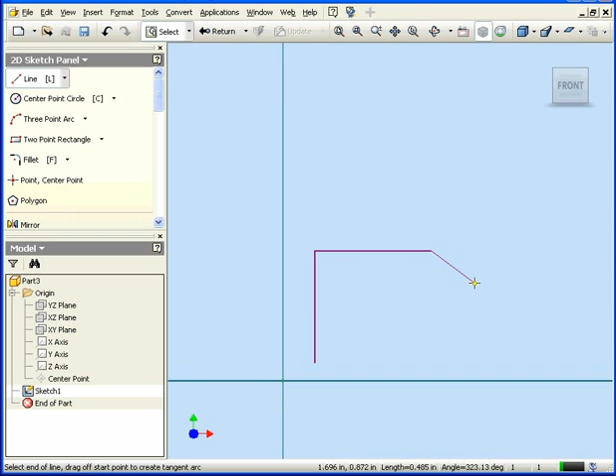Welcome to our tutorial about the Extrude tool. Here I've already got a sketch I created on the XY plane. Let's begin by using the line tool. I'm going to create a shape. Something like this.

Right-click and done. It's a good idea to fully constrain your sketch before making it solid. However, sometimes it's not always possible. Fortunately, Inventor lets you work with unconstrained sketches. Let's hit Return, exit the sketch, and let's select the Extrude tool now.

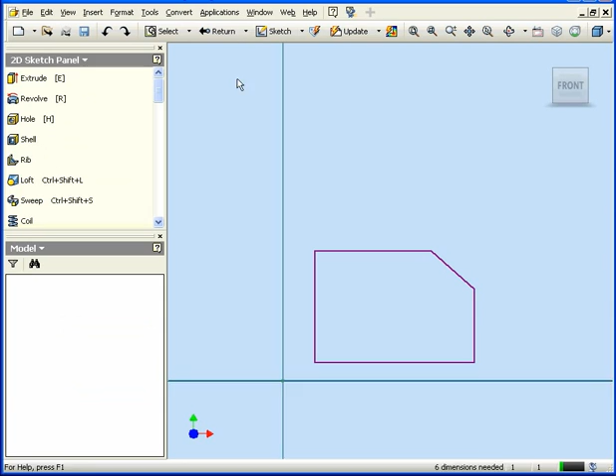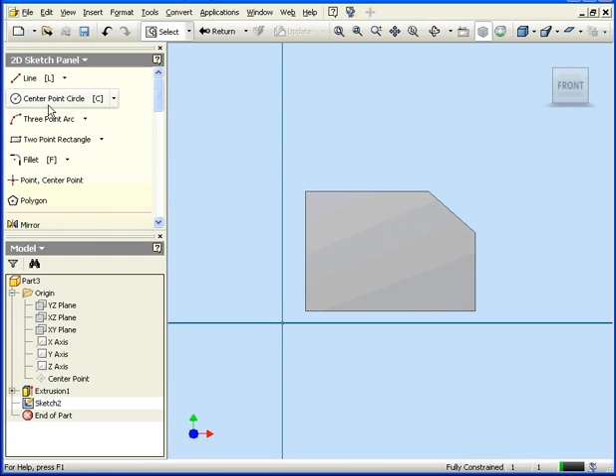Extend to both sides and click OK. Now let's return to a front view. We'll create a second sketch, again on the XY plane. Let's create a circle. Somewhere around here.

Right-click, done. The reason I don't see the circle I created is because it's partially covered by the solid. I need to right-click and select Slice Graphics. F7's the keyboard shortcut for that, by the way. Okay, let's create one more circle.

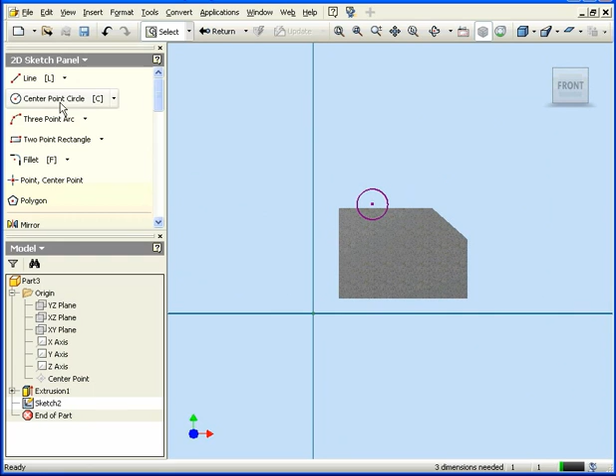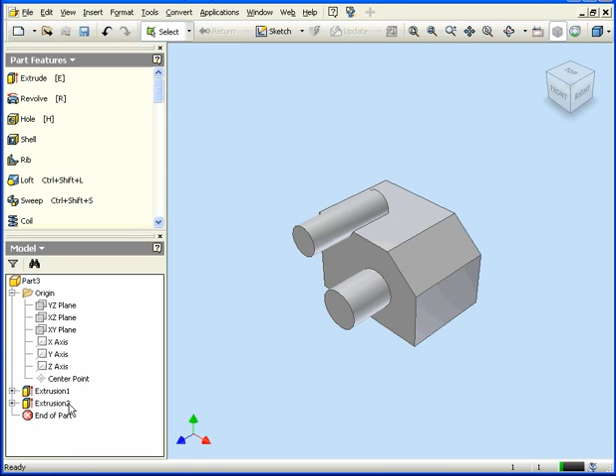Return to exit the sketch, and now let's select the Extrude tool again. This time we'll select some profiles. Selecting the Join option here will add material. To edit Extrusion 2, double-click on it. Its dialog window opens. The next option here is Cut. This removes material.

Let's double-click again on Extrusion 2. The final option here is Intersect. This creates a solid from the shared volume of the extruded features. The Extents drop-down menu lets you control the method for ending the feature. The Distance option lets you specify a specific length.

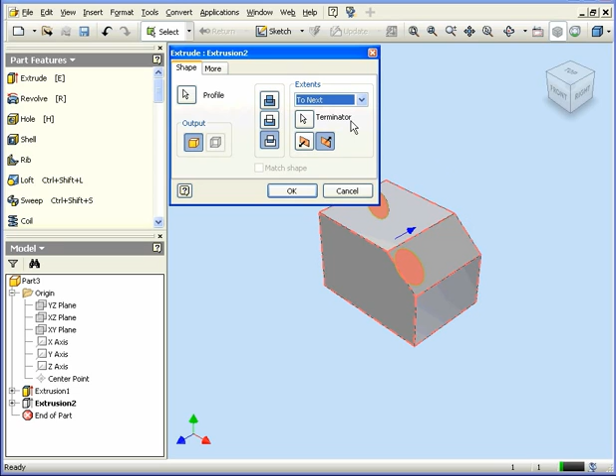To Next will extend the feature to the next face or plane. The third option, To, this is for when the termination feature doesn't fully intersect with the extrusion. And the fourth option is From To. This option lets you specify the beginning and end face or plane.

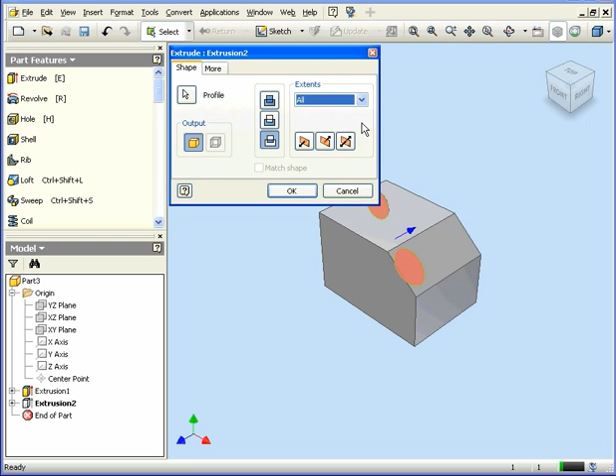The last option is All. This option extends the extrusion through the entire part. The All option is useful if you modify the part later. The extrusion will be updated as well. Okay, for now let's choose Distance.

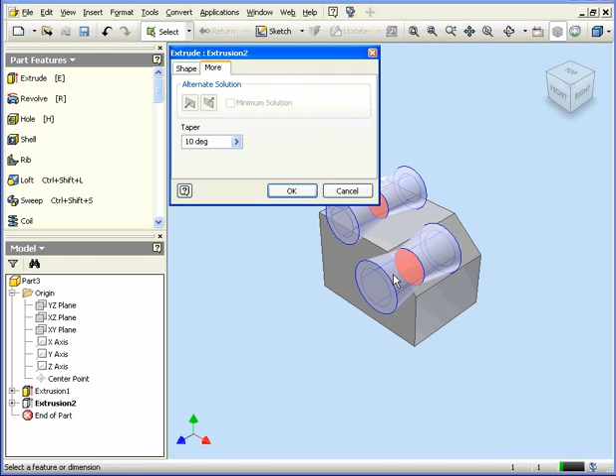The direction of the extrusion is determined with these three icons: left, right, or midpoint extrusions. Let's explore the options on the More tab. Here we can specify a taper for the extrusion. Let's say 10 degrees. The taper angle is reflected in your preview. Let's click OK.

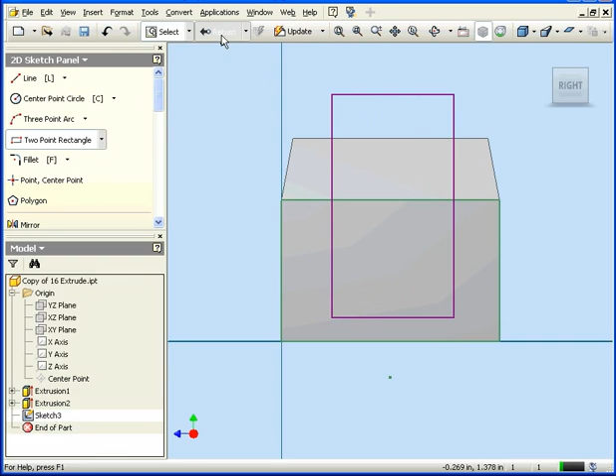Let's create one more sketch. Right-click, Insert Sketch. Now let's activate the Rectangle tool. I'm going to create a rectangle somewhere about here. Return to exit the sketch. Let me just rotate this slightly.

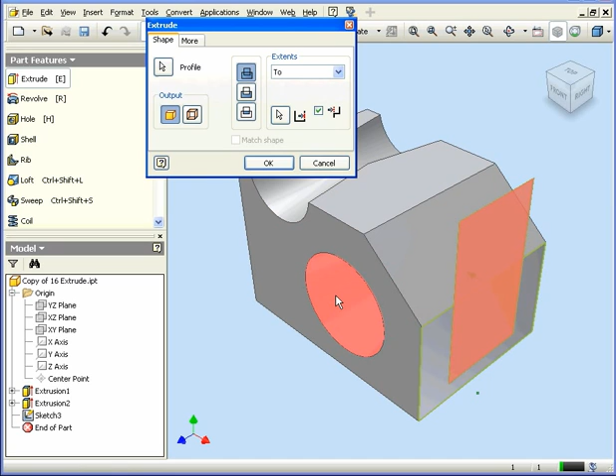Okay, let's activate the Extrude command again. Dialog window opens. Let's select a profile. Under Extents, this time we'll choose To. And for our limit, we'll choose this cylindrical face. Click OK. Inventor gives me an error message.

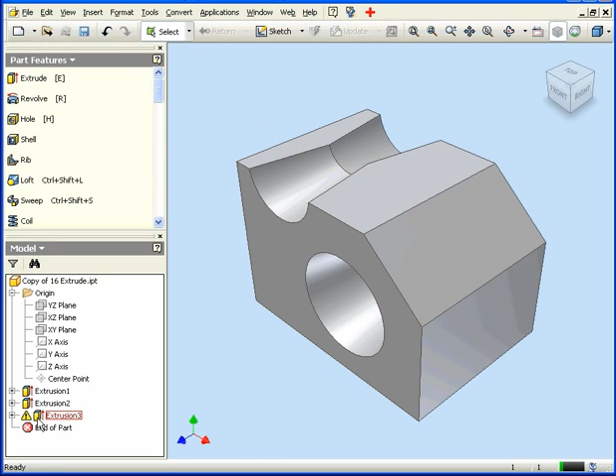Let's explore this. Edit. Let's select a different face. OK. Same problem. Basically, the projection of the sketch is bigger than the projection of the cylindrical surface. Let's accept. Note this, in the browser there's a warning sign next to Extrusion 3. Let's expand Extrusion 2 now.

Now right-click, Edit Sketch. Let's rotate our part a bit, right-click, and Slice Graphics. Let's select this circle and delete it. Now let's activate the 2-point rectangle tool. We're going to create a rectangle somewhere about here. Click Return to exit the sketch.

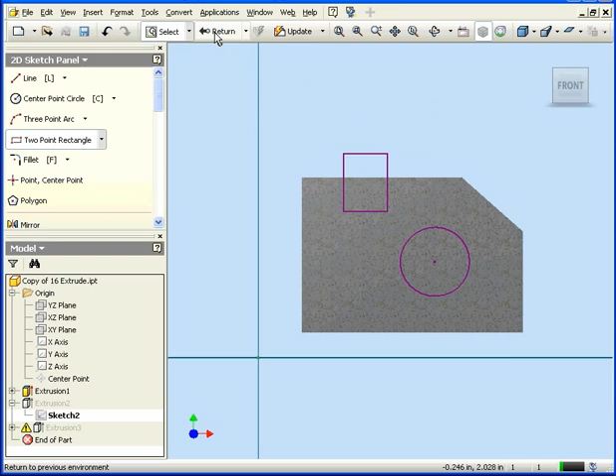Inventor gives us another warning message. Inventor can't build the extrusion. The reason for this is that the face can't be found. Let's accept. Now let's double-click on Extrusion 3. The dialog window opens. Let's select this face this time. OK. We get another error message. The extrusion distance is 0.

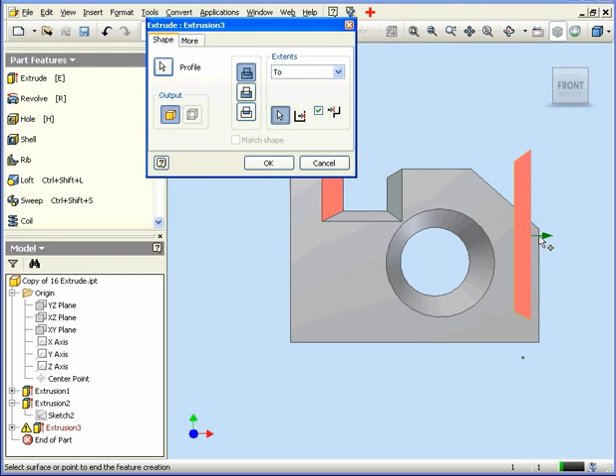This time, let's click Edit. As you see, the green arrow is pointed in the wrong direction. Let's go to the More tab. Now let's click Alternate Solution and click OK. Let's take a top view. We'll see how it looks from the top. Basically, Extrusion 3 was extruded up to this face.

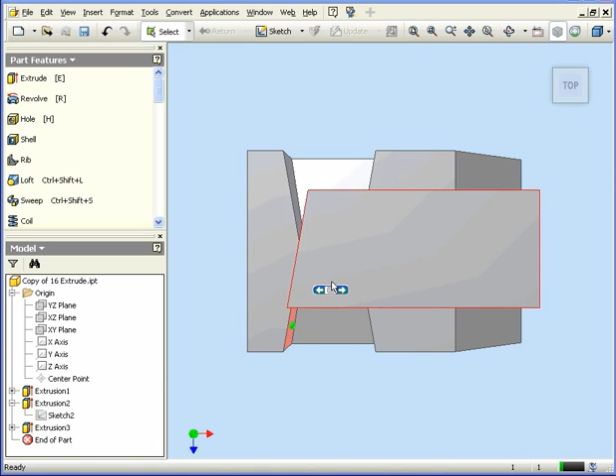Inventor wants you to build a good part. The warnings and the troubleshooting features can be very helpful. And this concludes our tutorial on basic extrusions.